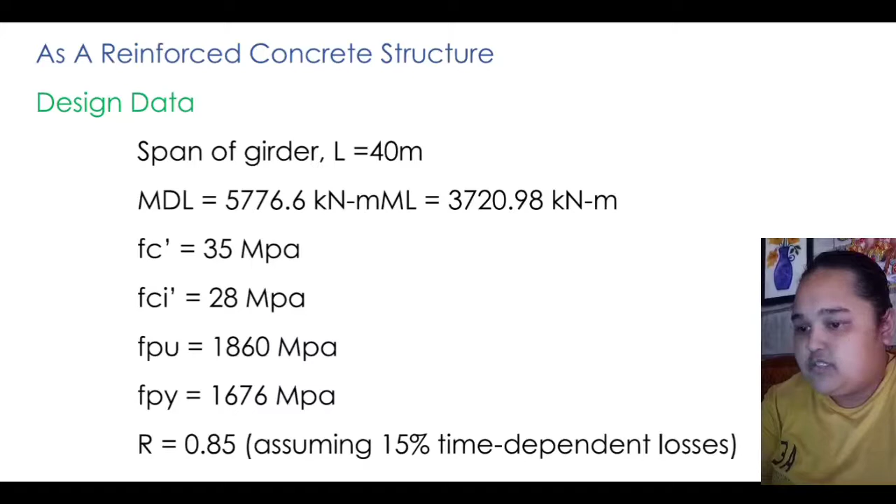3720.98 kilonewton meter, FC prime 35 megapascal, FCI prime 28 megapascal, FPU 1860 megapascal, FPY 1676 megapascal.

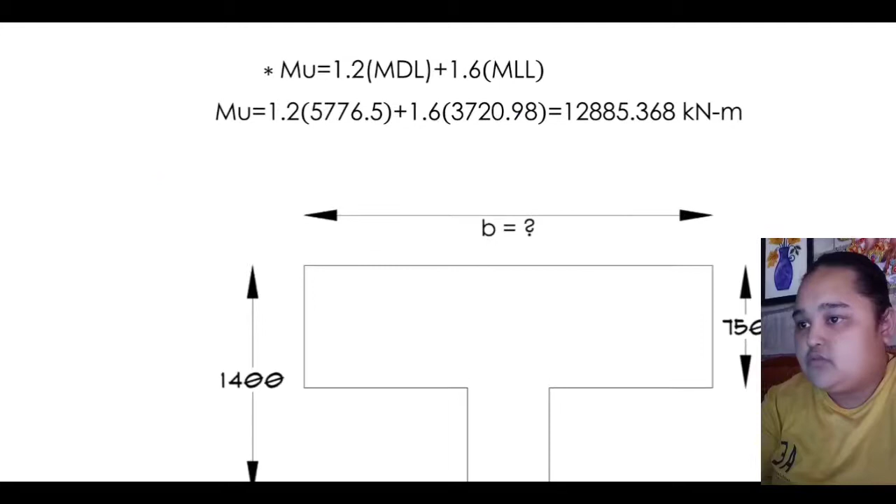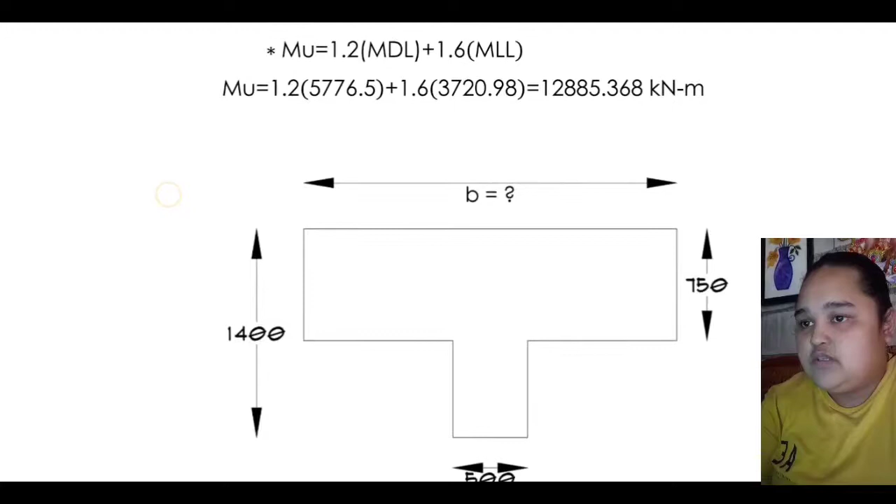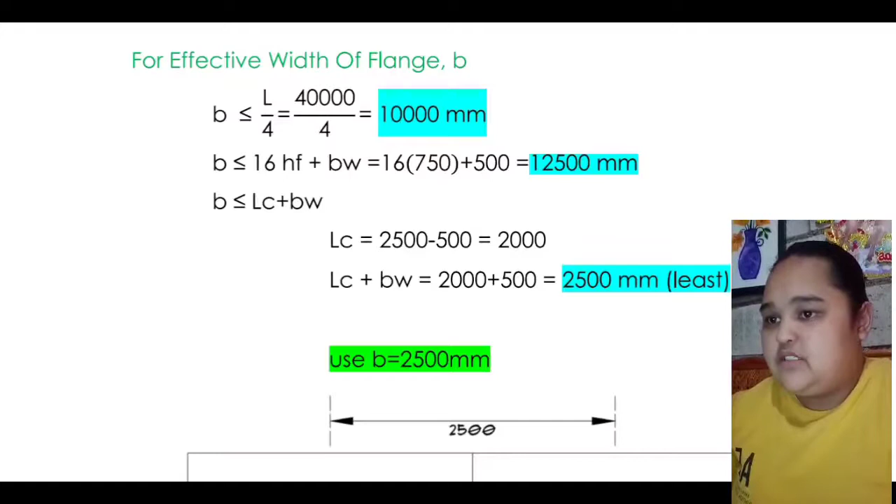Compute for effective width of flange, which is B. B is less than or equal to 40,000 over 4, equal to 10,000 millimeter. B is less than or equal to 16 HF plus BW, which is 16 times 750 plus 500, equal to 12,500. B is less than or equal to LC plus BW.

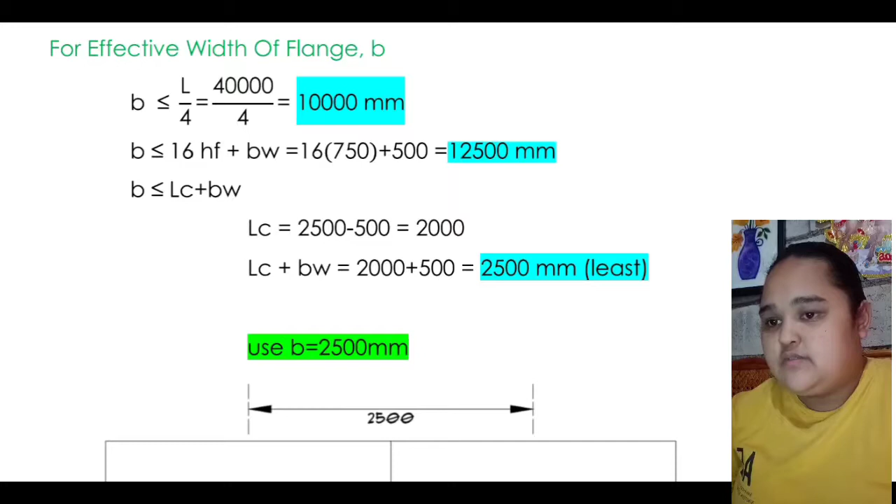LC is equal to 2,500 minus 500, that is 2,000. So B is 2,000 plus 500, equal to 2,500. We can use B as 2,500 because it is the least.

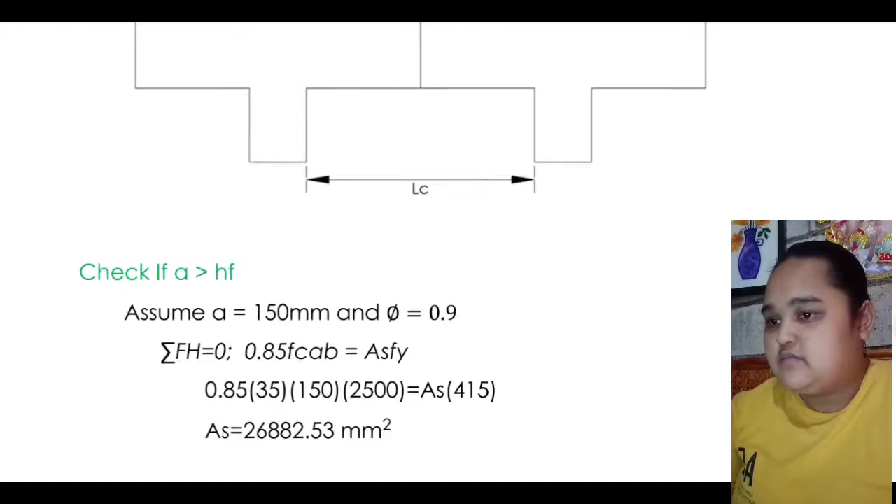Then check if A is greater than HF. Assume A is equal to 150 millimeter and phi is equal to 0.9.

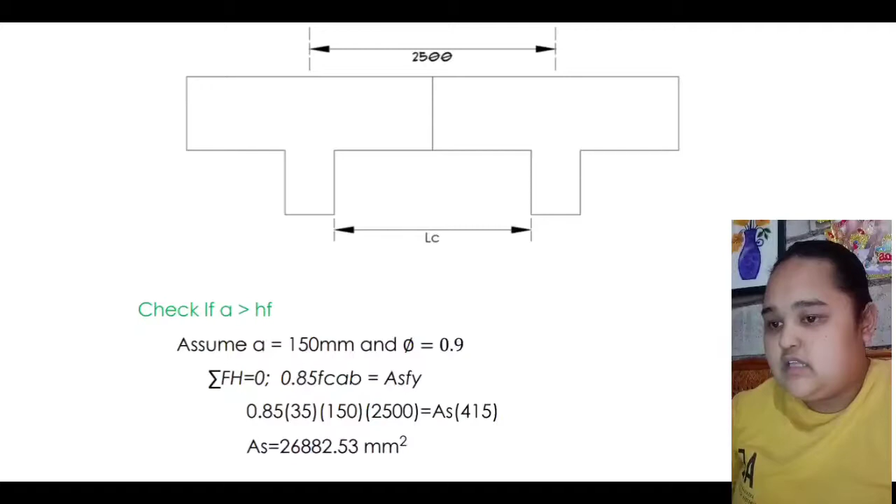Summation of forces horizontal is equal to 0. Then 0.85 FC prime AB is equal to AS times FY. 0.85 times 35 times 150 times 2,500 is equal to AS times 415. AS is equal to 26,882.53 millimeters squared.

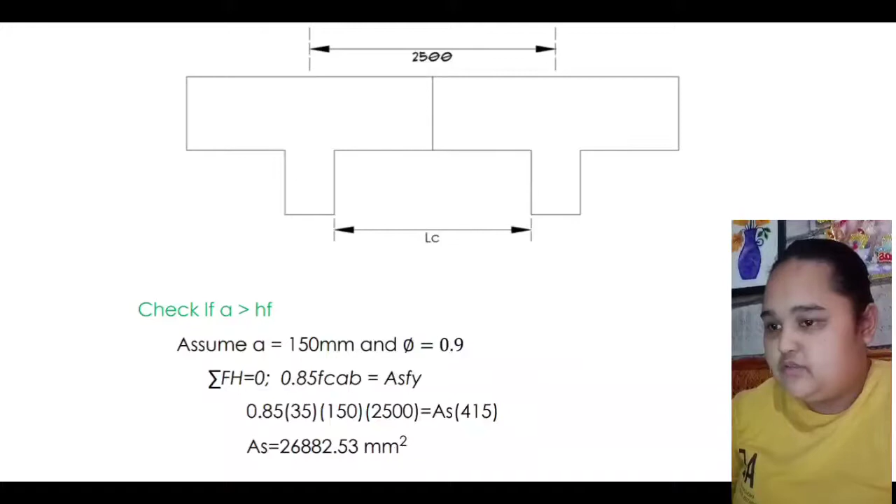Then compute the MU1, which is 0.9 AS times FY, quantity D minus A over 2. MU1 is equal to 0.9 times 26,882.53 times 415, quantity 1325 minus 150 over 2, equal to 12,550.78 kilonewton meter. Since MU1 is less than MU,

design as T-beam. Next is determine AS. MU2, which is 0.9 times 0.85 FC prime times AB times D minus T over 2.

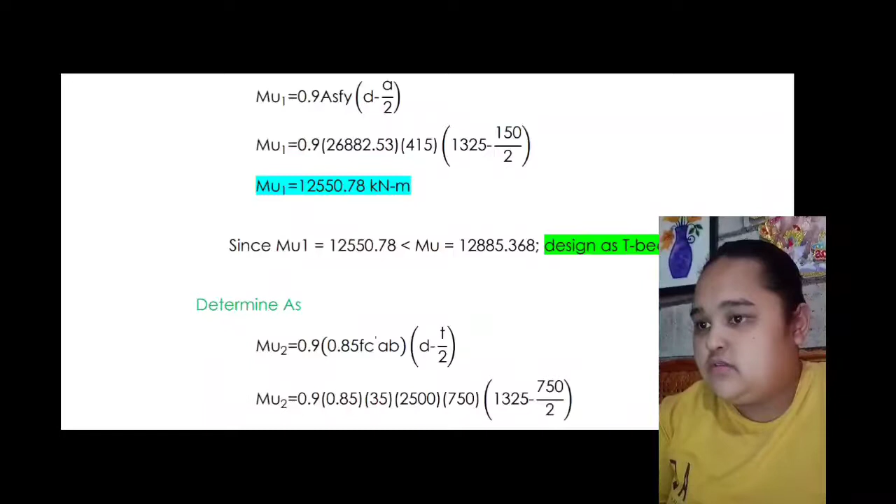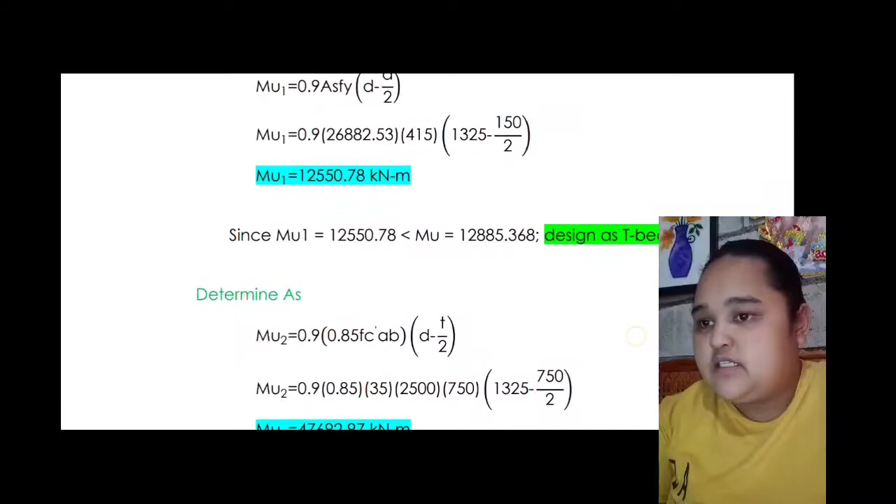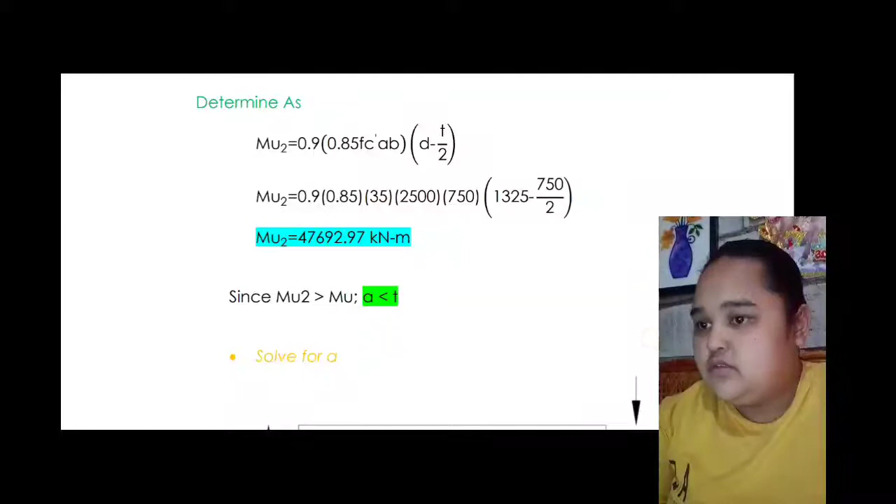MU2 is equal to 0.9 times 0.85 times 35 times 2500 times 750 times quantity 1325 minus 750 over 2. MU2 is equal to 47,692.97 kilonewton meter. Since MU2 is greater than MU,

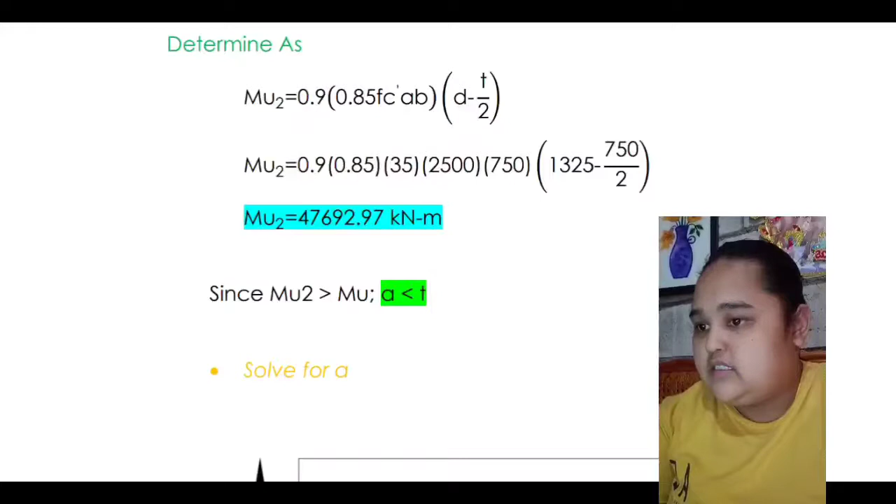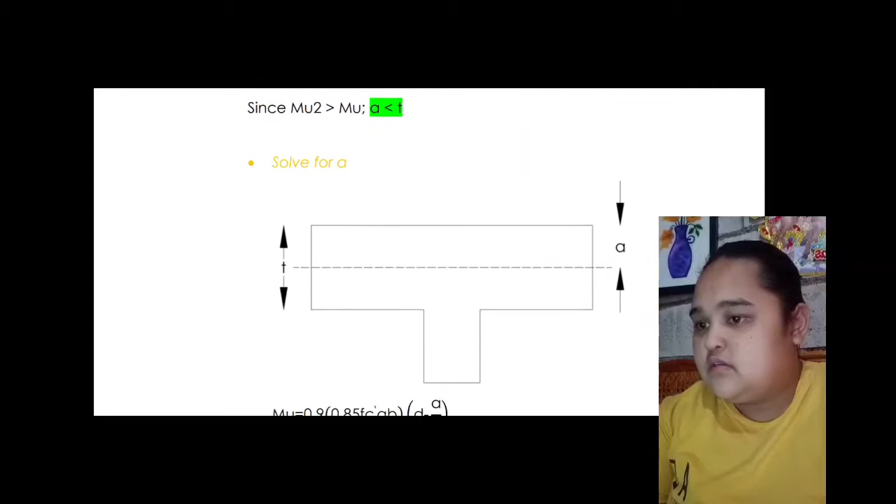A is less than T. Then we solve for A. Substituting the value of mu, we can get the value of A.

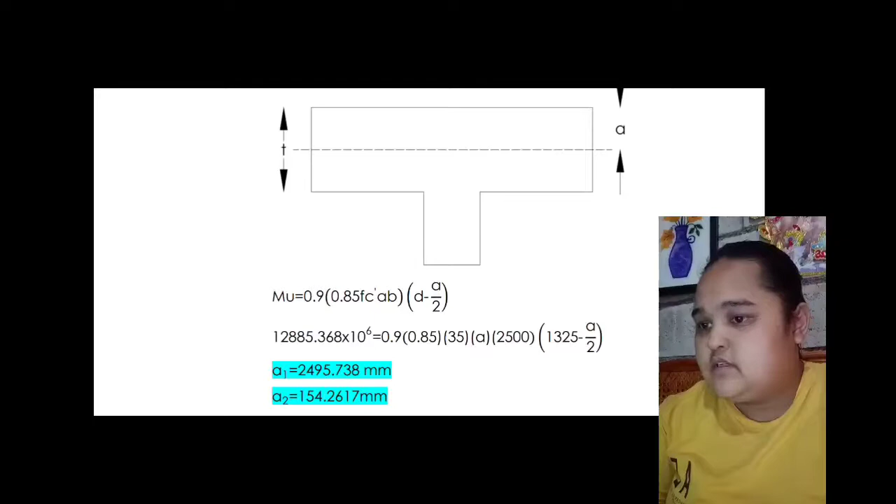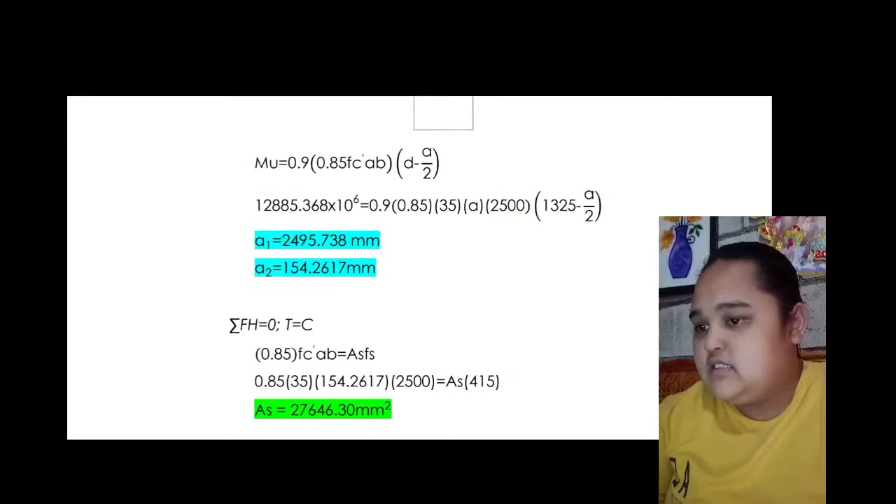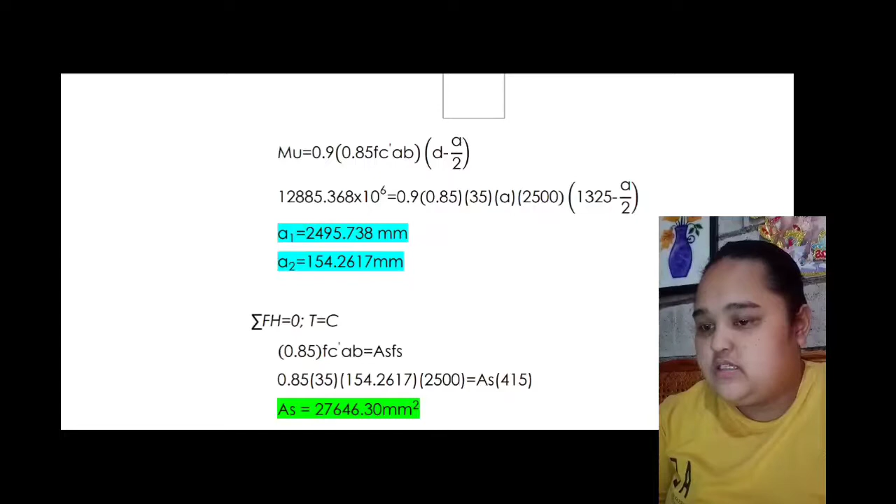Next is summation of forces horizontal, T is equal to C. 0.85 times FC prime AB equal to AS times FS, which is 0.85 times 35 times 154.2617 times 2500, equal to AS times 415.

The next is check if P minimum is less than P and P is less than P max. P max is equal to 0.016. P minimum is 1.4 over Fy, which is 1.4 over 415, equal to 0.00337. P is AS over BD, which is 27,646.3 over 2500 times 1325, equal to 0.0083.

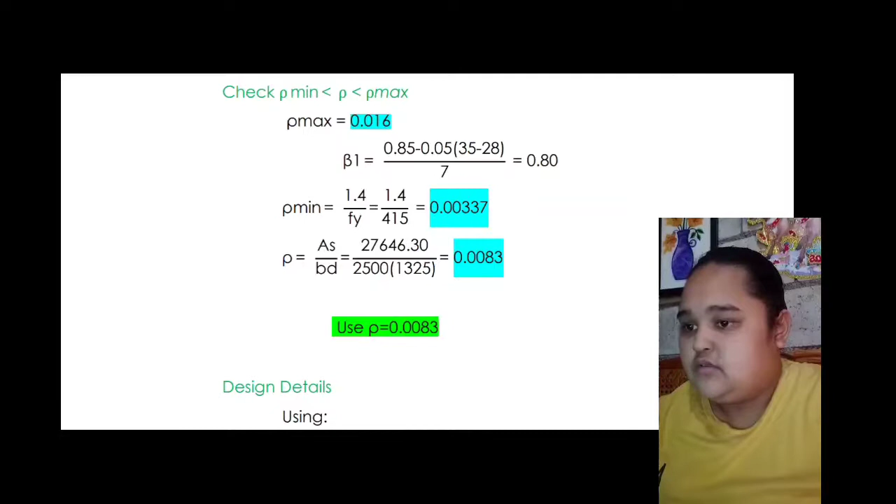Use the value of rho equal to 0.0083. Design details: 28 pieces of 36 mm diameter or 35 pieces of 32 mm diameter.

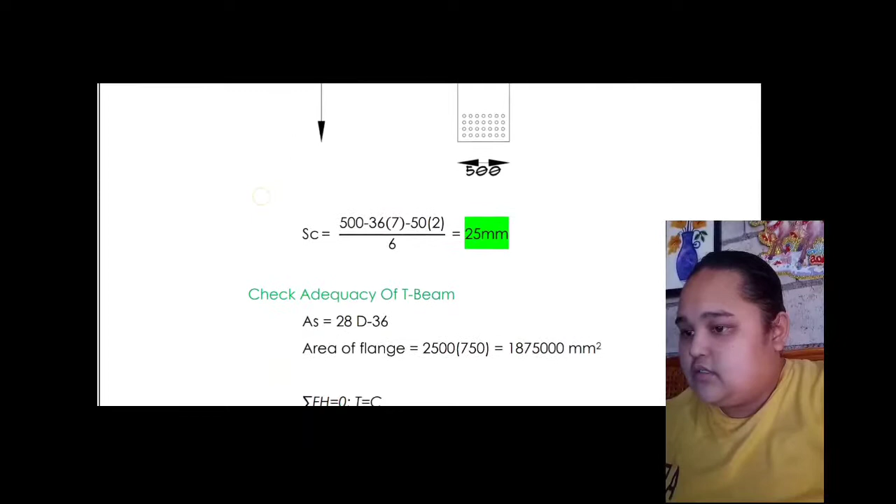Computing for SC, which is 500 minus 36 times 7 minus 50 times 2, over 6, is equal to 25 mm. Check adequacy of T-beam.

AS is 28 pieces of 36 diameter. Area of flange, 2500 times 750, is equal to 1,875,000 millimeter squared. T is equal to C.

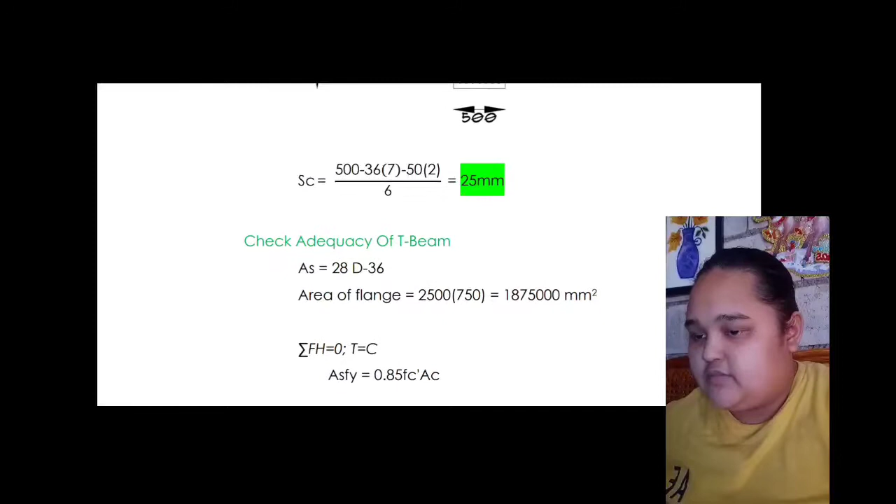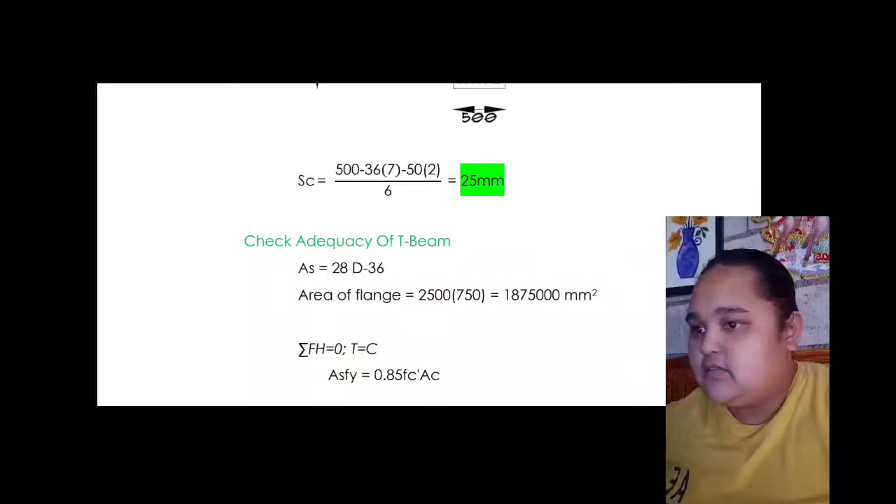AS times Fy is equal to 0.85 FC prime times AC. Then we will get the value of AC. Since AC is less than area of flange, T is greater than A. And compute for A and C.

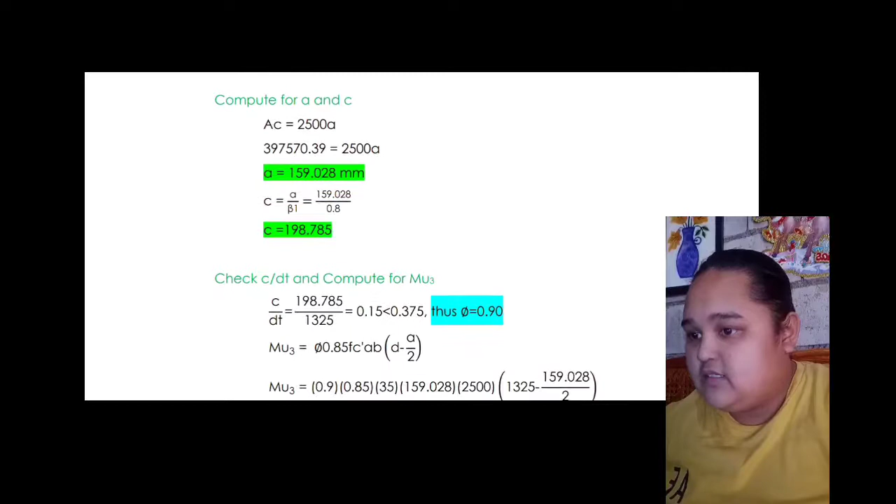AC is equal to 2500 A. So the value of A is 159.028 mm. And C is equal to 159.028 over 0.8, and C is equal to 198.785. Then check if C over dt...

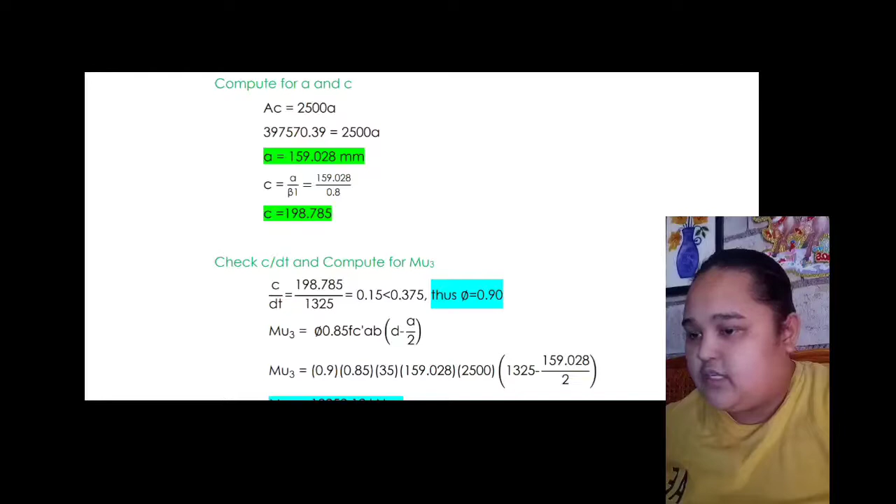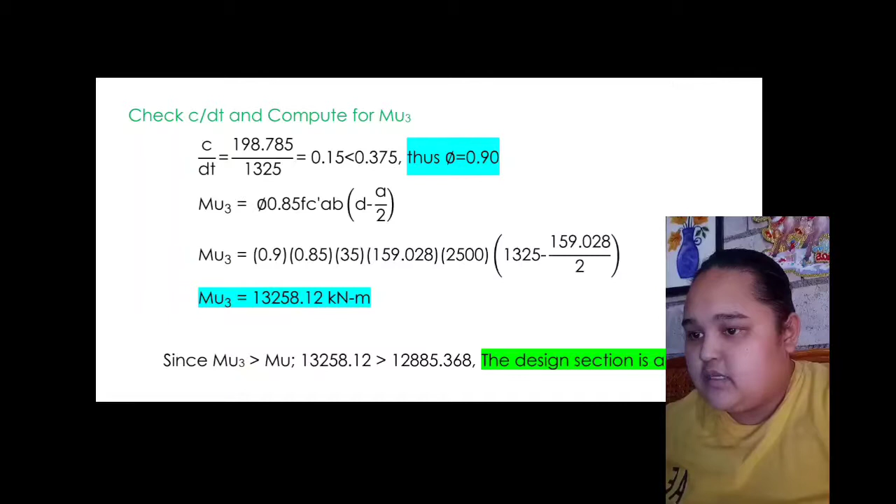and compute for mu3. C over dt is equal to 198.785 over 1325, is equal to 0.15, which is less than 0.375.

So we will use as the phi is 0.9. Computing mu3...

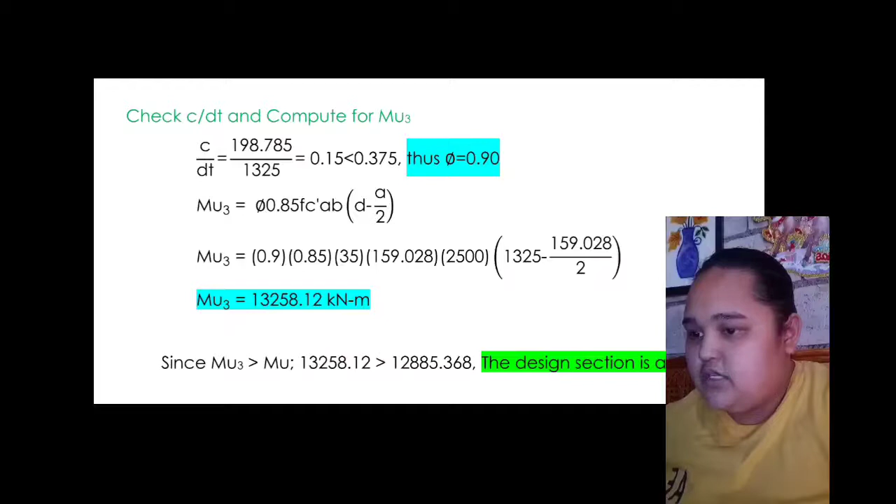is 0.9 times 0.85 times 35 times 159.028 times 2500, times quantity 1325 minus 159.028 over 2. Then the answer is 13,258.12 kilonewton meter. Since mu3 is greater than mu, the design section is adequate.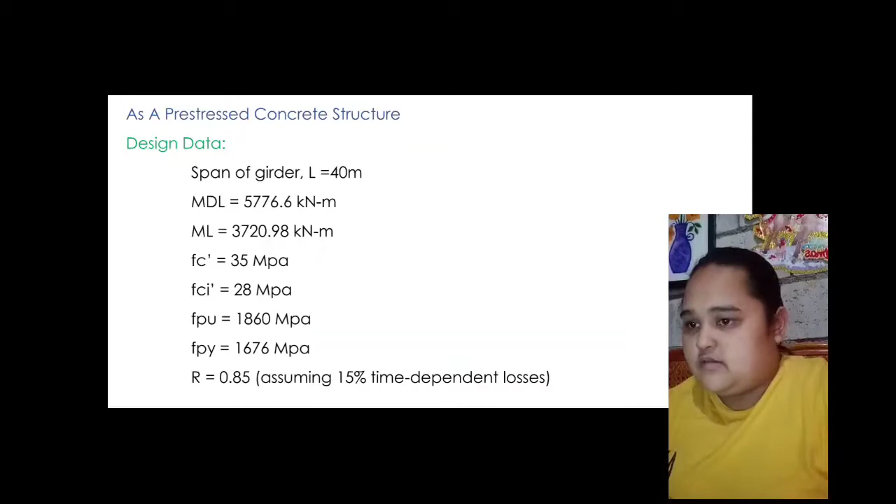And R is 0.85, assuming 15% time-dependent losses. Designing a symmetrical section using the following proportion. BW is 0.5 of B and HF is 0.25 of H. H is twice the B.

Since the beam is post-tension, the tendon will have a variable eccentricity, with critical section at midspan. The allowable stresses...

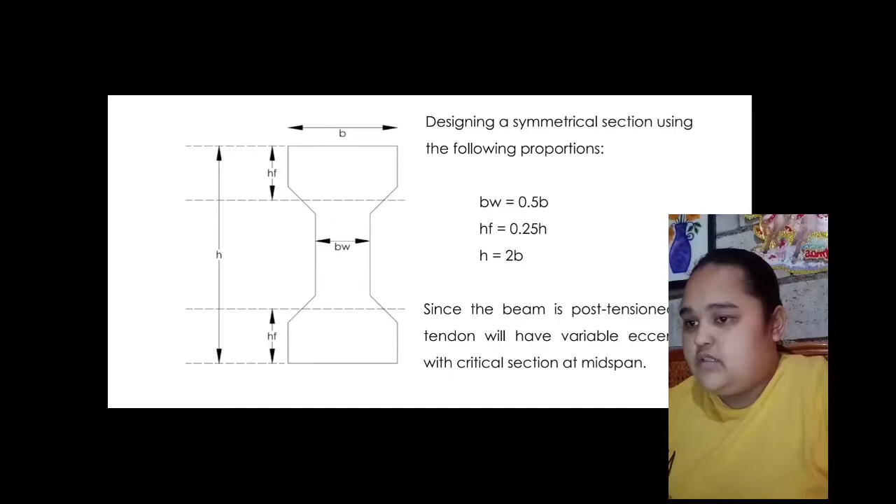in initial stage, FCI, which is negative 0.6 FCI prime, is equal to negative 16.8 MPa, compression. The FTI is equal to 0.25 square root of 28, equal to 1.32 MPa, that is tension.

In the final stage, FCS is equal to negative 0.6 times 35, equal to negative 21 MPa, compression. FTS is 0.62 square root of 35, equal to 3.67 MPa tension.

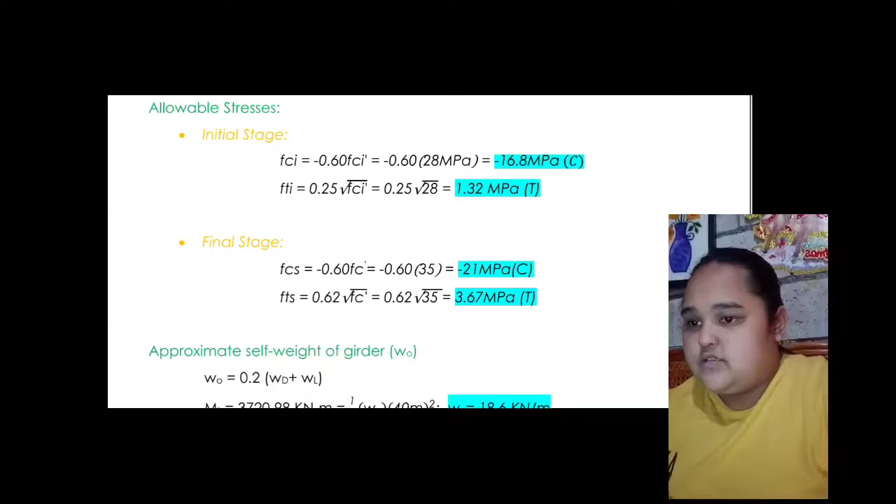Approximate self-weight of girder, WO is equal to 0.2 quantity WD plus WL.

ML is equal to 3720.98 kilonewton meter, is equal to 1/8 WL, 40 meters squared. WL is equal to 18.6 kilonewton per meter.

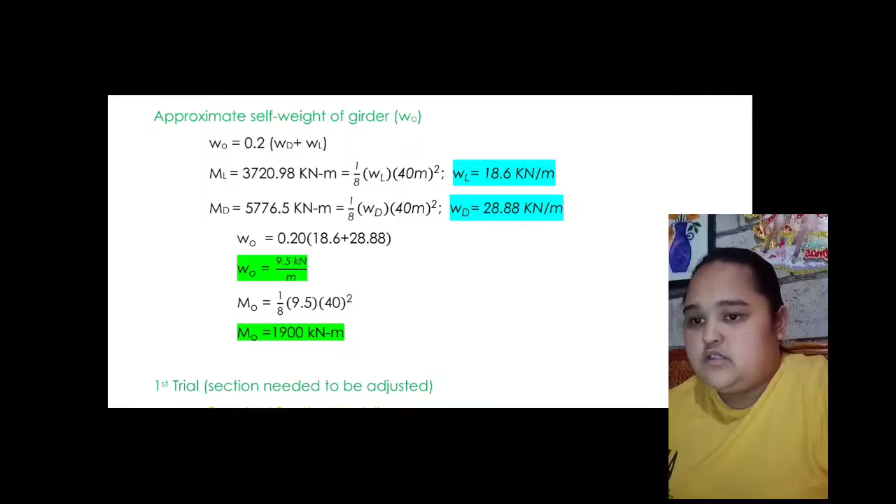And MD is equal to 5776.5, equal to 1/8 WD, 40 squared. WD is equal to 28.88 kilonewton per meter.

WO is equal to 0.2 quantity 18.6 plus 28.88. So it equals to 9.5 kilonewton per meter.

MO is equal to 1/8 times 9.5 times 40 squared, equal to 1900 kilonewton meter.

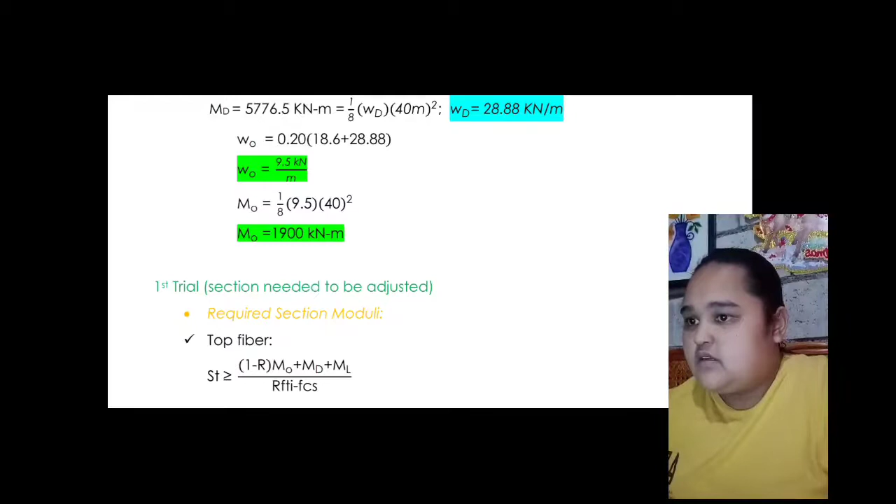Substitute the value, we will get 442.21 times 10 raised to 6 cubic millimeter.

At the bottom fiber, SB is greater than or equal to 1 minus R times MO plus MD plus ML over FTS minus RFCI.

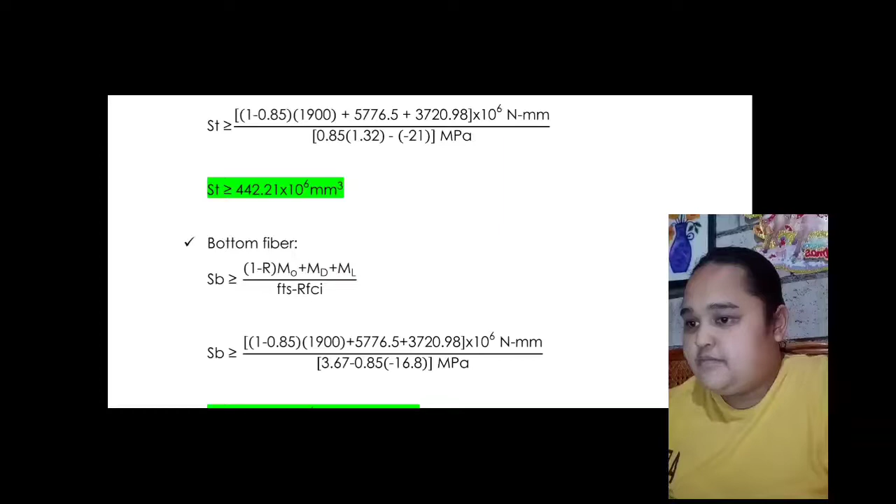Substitute again the value, then we will get 544.98 times 10 raised to 6 cubic millimeter. The bottom fiber governs because it's the larger value.

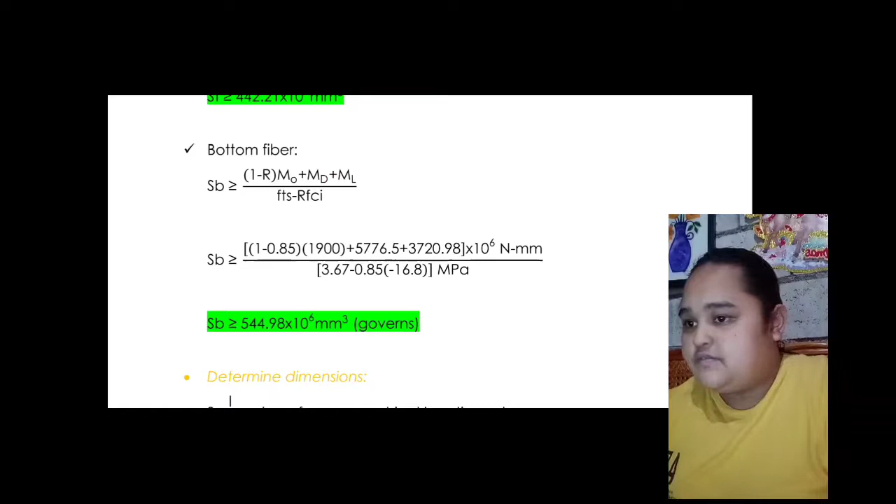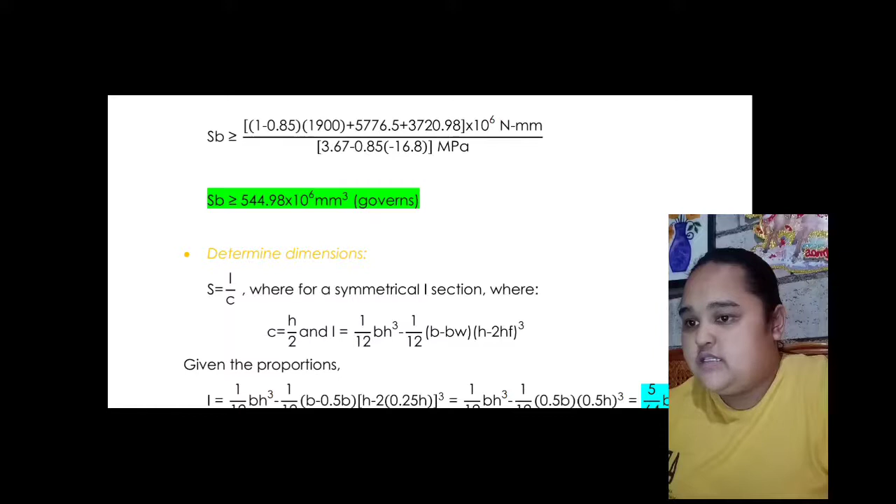The next step is to determine the dimensions. S is equal to I over C, where for the symmetrical I section, C is equal to H over 2, and I is equal to 1 over 12 times B times height cubed minus 1 over 12 times B minus BW times H minus 2HF cubed.

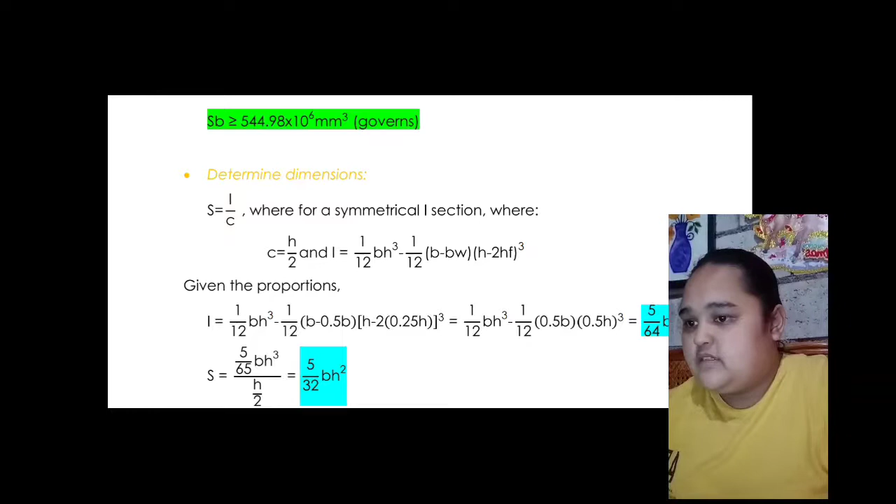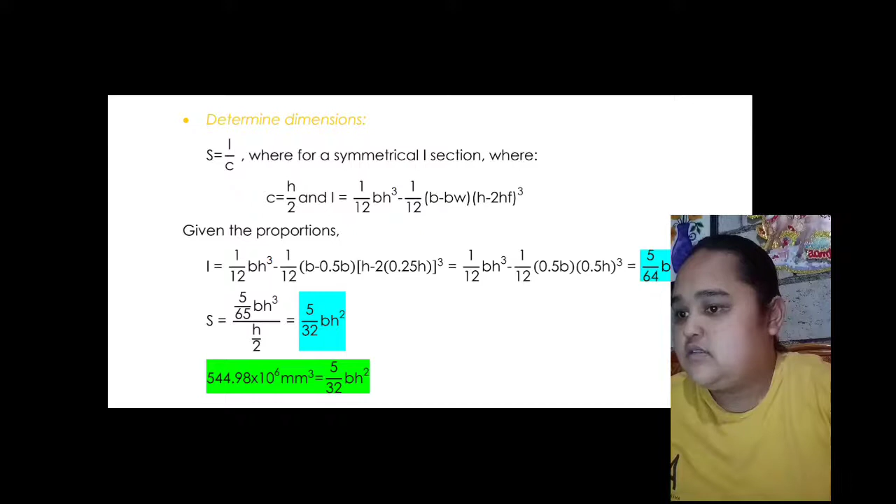Substitute the value, and given the proportion, we will get 544.98 times 10 raised to 6 millimeter cubed equal to 5 over 32 BH squared.

If H is 2B, B is equal to 961.167 millimeter. You can round it up to 1,000 millimeter.

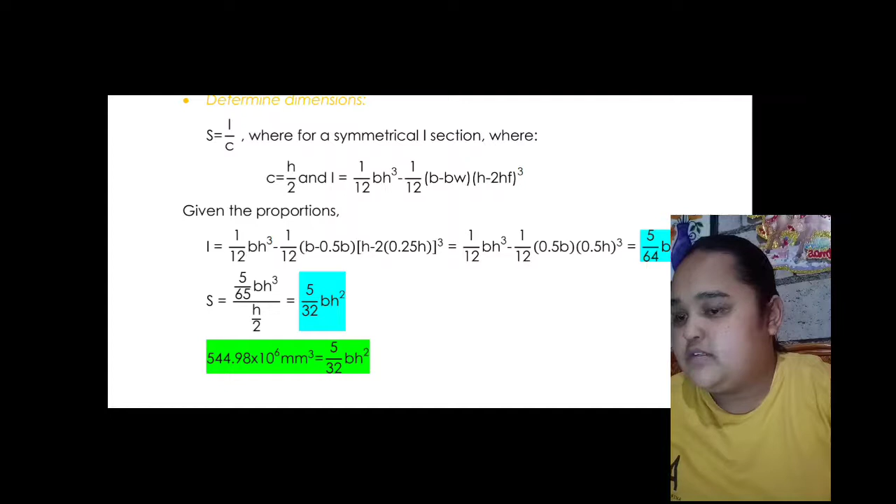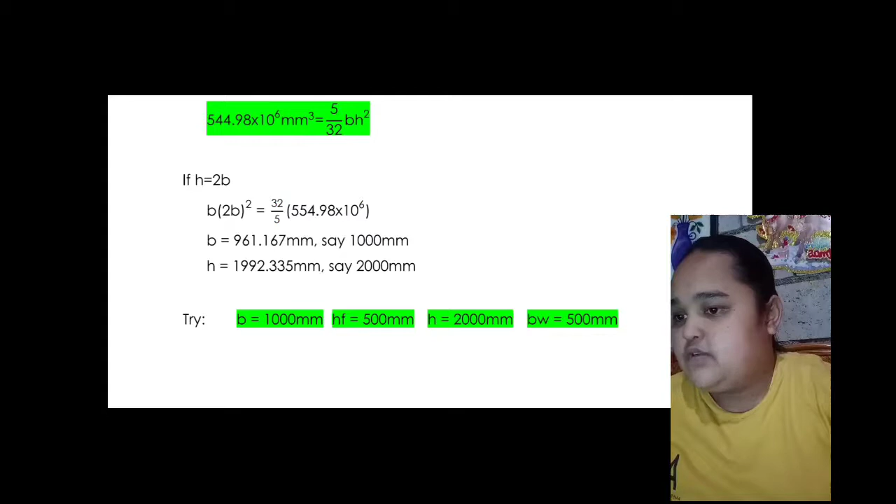H is equal to 1992.335 millimeter, you can also round it up to 2,000 millimeter. Then let's try the value of B is equal to 1,000, HF is 500, H is 2,000, and BW is 500 mm, all in millimeters.

Check the section modulus, S provided: 1 over 12 times 1,000 times 2,000 cubed minus 1 over 12 times 500 times 1,000 cubed, over 1,000, is equal to 625 times 10 raised to 6 cubic millimeter.

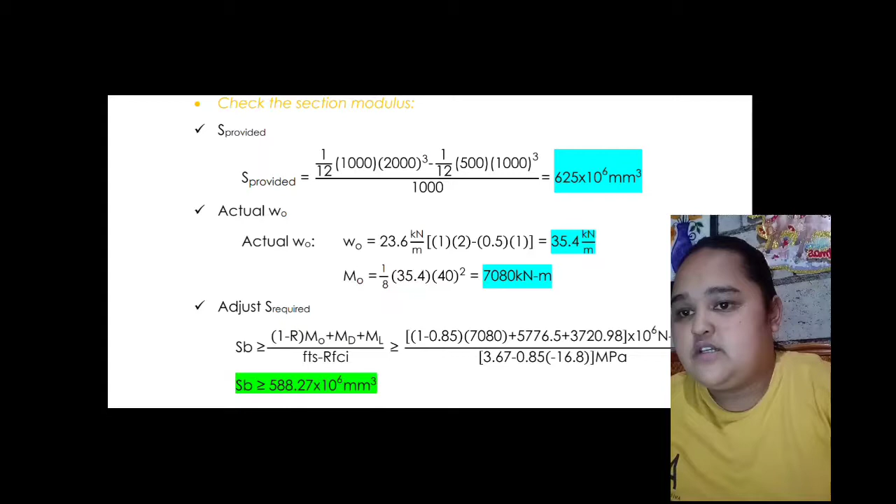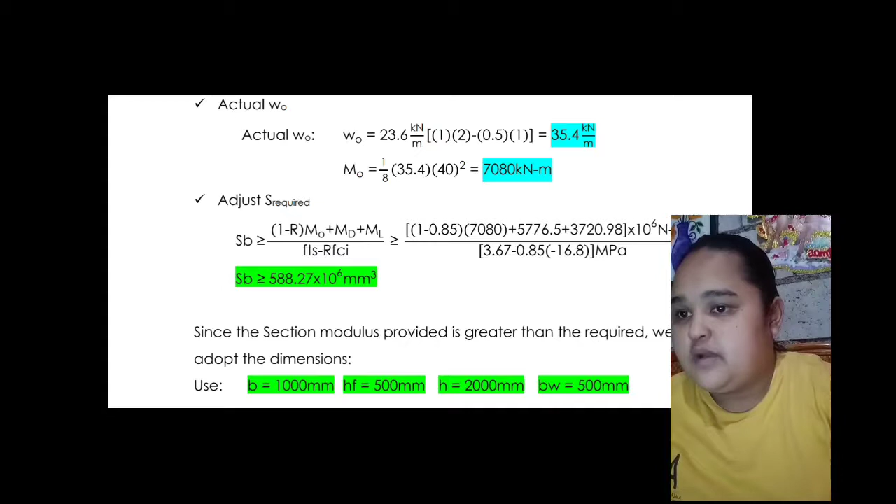The actual WO is 23.6 kilonewton per meter. Quantity 1 times 2 minus 0.5 times 1 quantity is equal to 35.4 kilonewton per meter.

MO is equal to 1 over 8, 35.4 times 40 squared, is equal to 7,080 kilonewton meter.

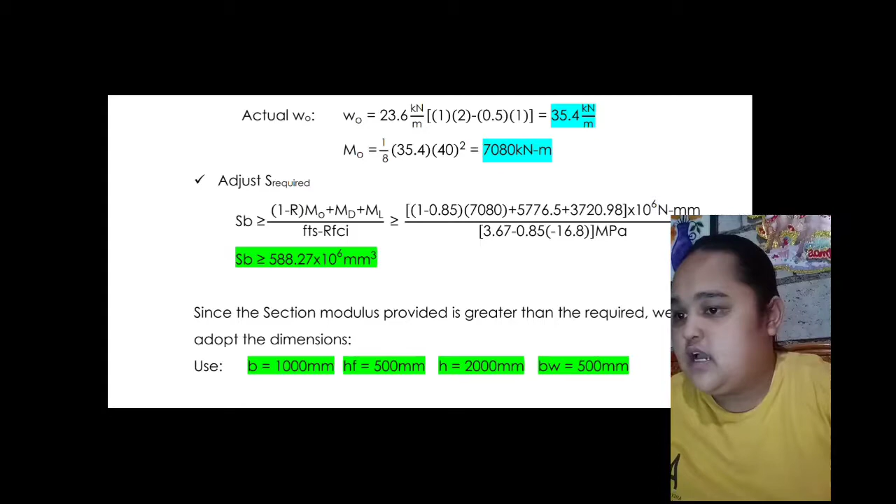Adjusted, the S required, the SB, is 588.27 times 10 raised to 6 cubic millimeter.

Since the section modulus provided is greater than the required, we can adopt the dimensions.

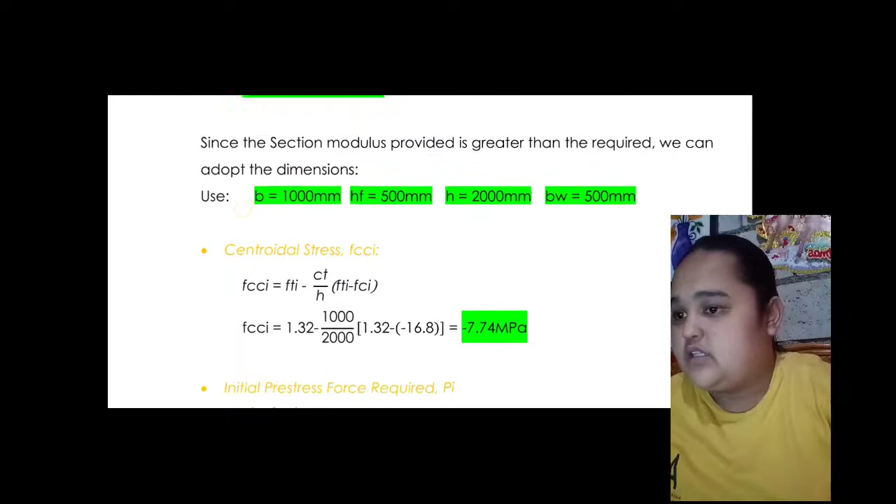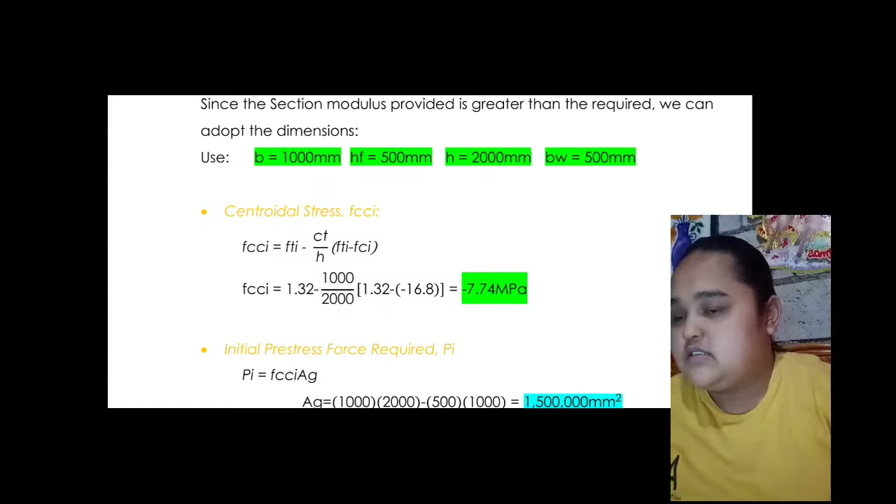Let's compute the centroidal stress, which is FCCI. FCCI is FTI minus CT over H, FTI minus FCI. 1.32 minus 1,000 over 2,000 quantity, 1.32 minus negative 16.8, is equal to negative 7.74 MPa.

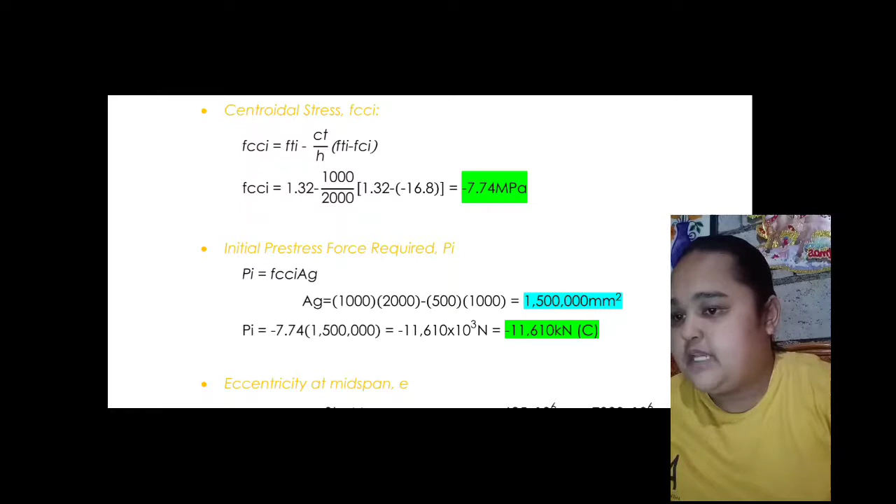The initial pre-stress force required, or PI, is negative 7.74 times 1,500,000, which is equal to negative 11,610 times 10 raised to 3 Newton, which is compression.

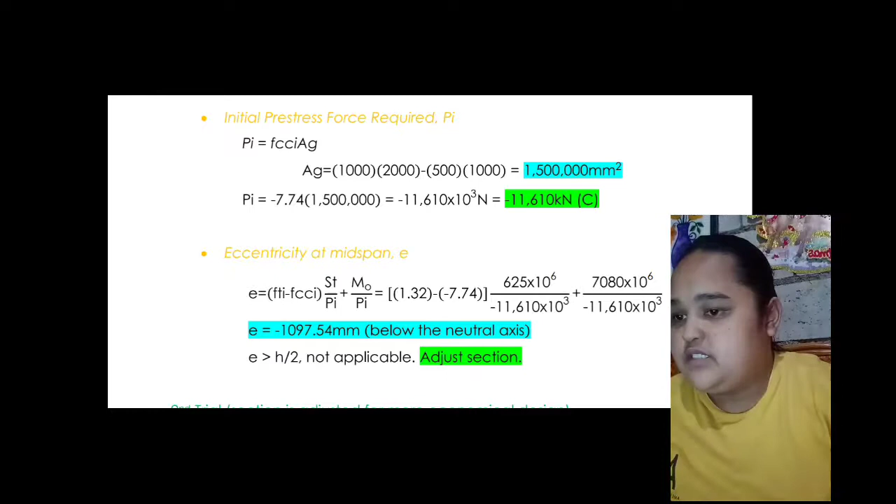The eccentricity at midspan, E, is FTI minus FCCI times ST over PI plus MO over PI. The value is negative 1097.54 mm below the neutral axis.

E is greater than H over 2, so not applicable. Adjust the section.

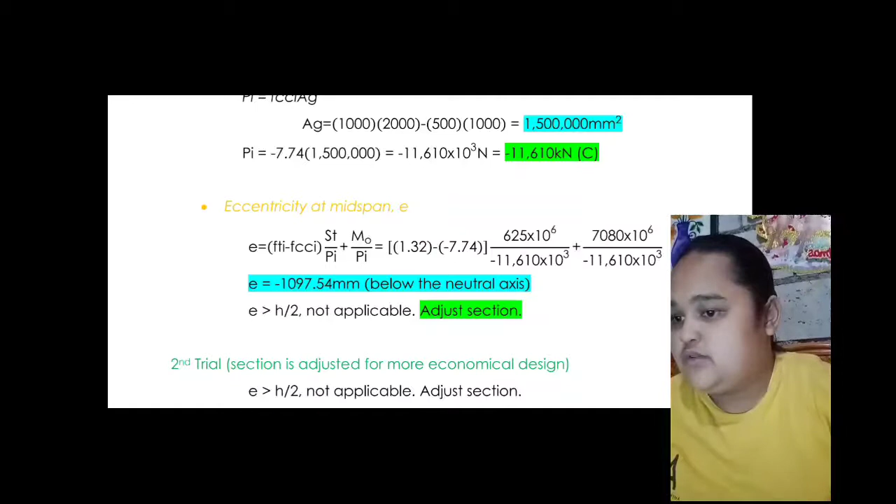The second trial section is adjusted for a more economical design. E is greater than H over 2, it's not applicable, and adjusted.

Check the modulus. S provided is 2,109.375 times 10 raised to 6 millimeter cubed.

WO is 79.65 kN per meter. MO is 15.93 times 10 raised to 3 kilonewton meter.

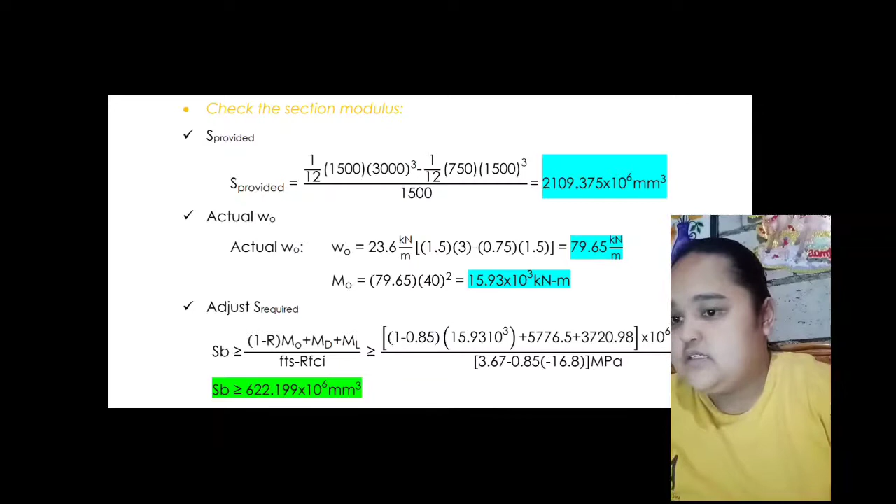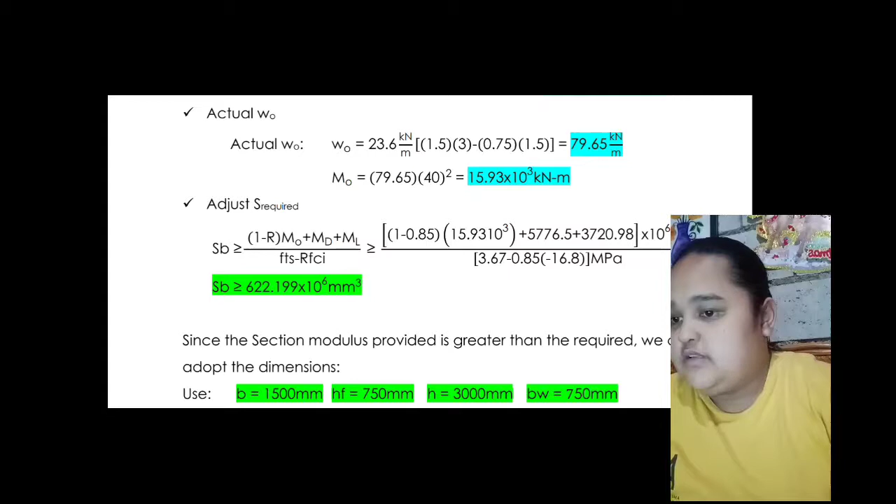The S required is 622.199 times 10 raised to 6 millimeter cubed. And since the section modulus provided is greater than the required, we can adopt the dimension.

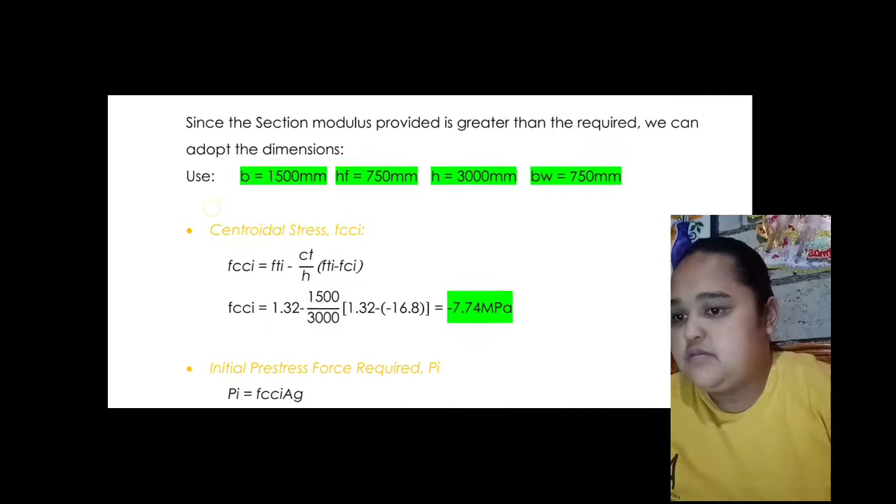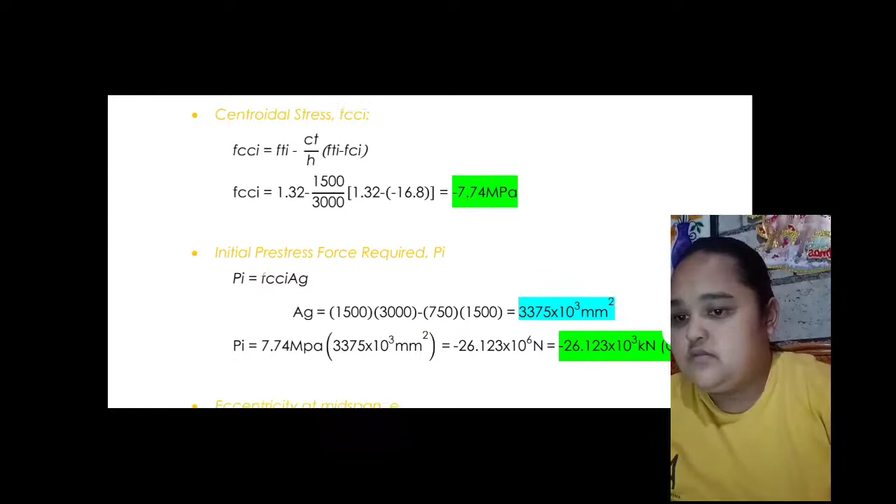Compute again the centroidal stress, which is negative 7.74 MPa. Initial pre-stress force required, or PI, is equal to negative 26.123 times 10 raised to 3 kilonewton compressive.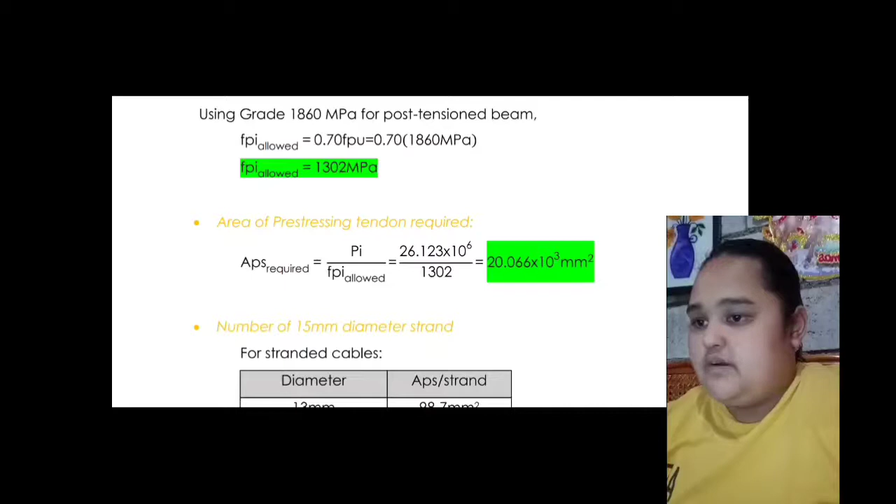The number of 15 mm diameter strand, N, is equal to APS required over APS per strand. 20.066 times 10 raised to 3 over 140 is equal to 144, 15 mm diameter strands, 10 tendons, 14 cables, 1 tendon, 4 cables. And check the strength capacity of the section.

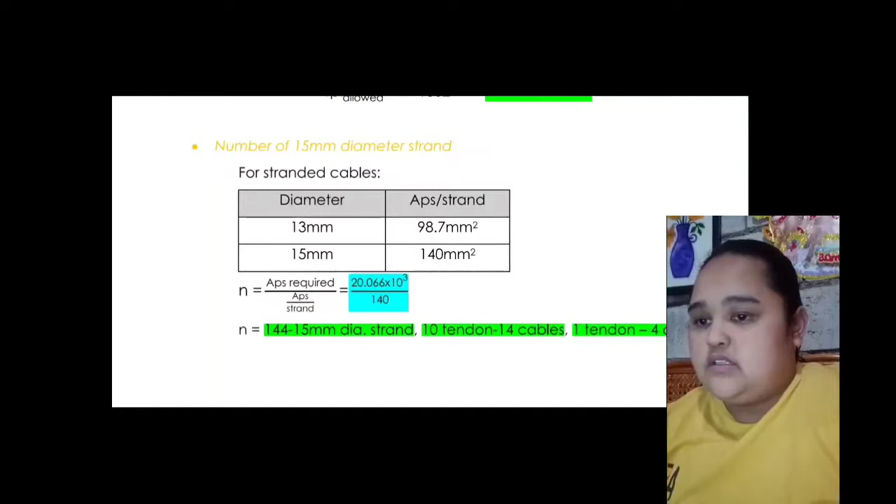APS 144 15 mm diameter strand with E equal to 1,341.383 mm. APS is 144 times 140 mm squared, equal to 20,160 mm squared. And DP is equal to 2,841.383 mm, and beta 1, 0.8.

rho P is 0.00473. Use grouted stress-relieved tendon.

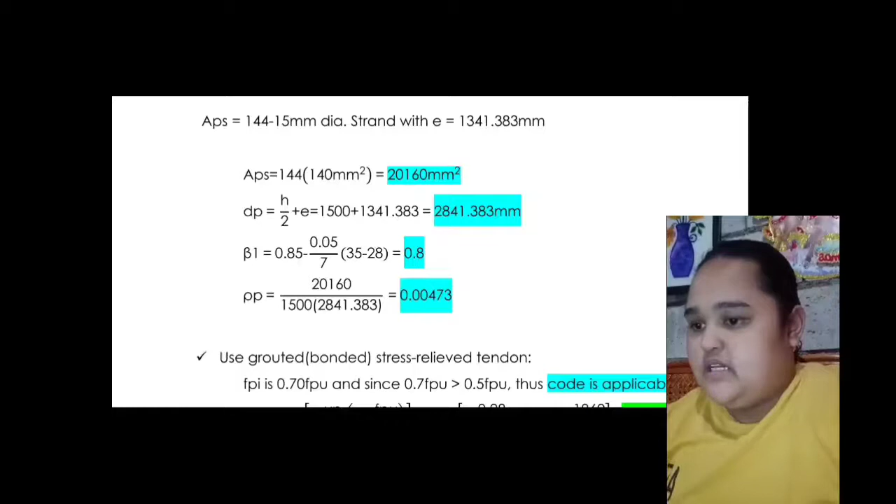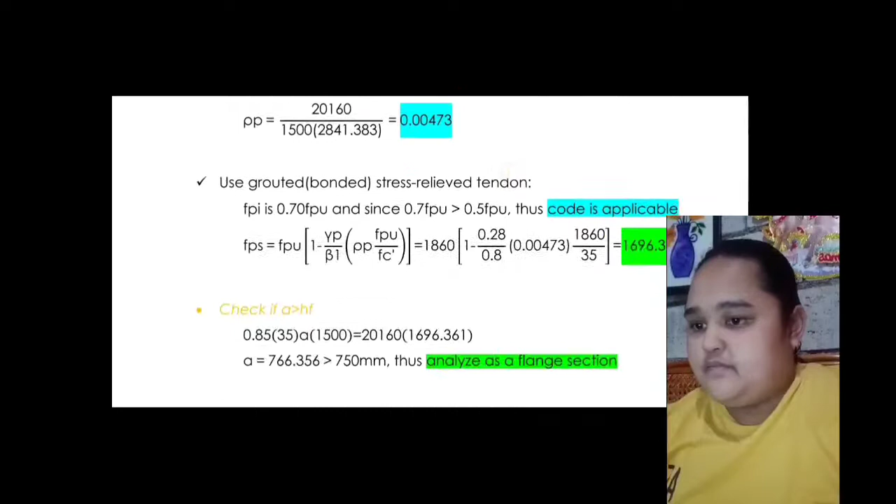FPI is 0.7 FPU, and since 0.7 FPU is greater than 0.5 FPU, thus the code is applicable. And FPS is equal to 1,696.361 megapascal.

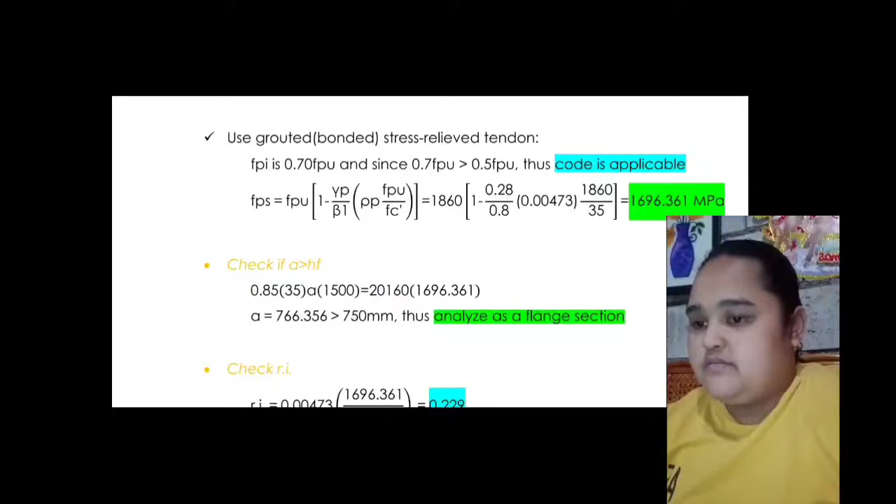Then check if A is greater than HF. 0.85 times 35 times A times 1,500 equal to 20,160 times 1,696.361. A is equal to 766.356, which is greater than 750 mm.

Thus, it is analyzed as a flanged section. Check RI. RI is equal to...

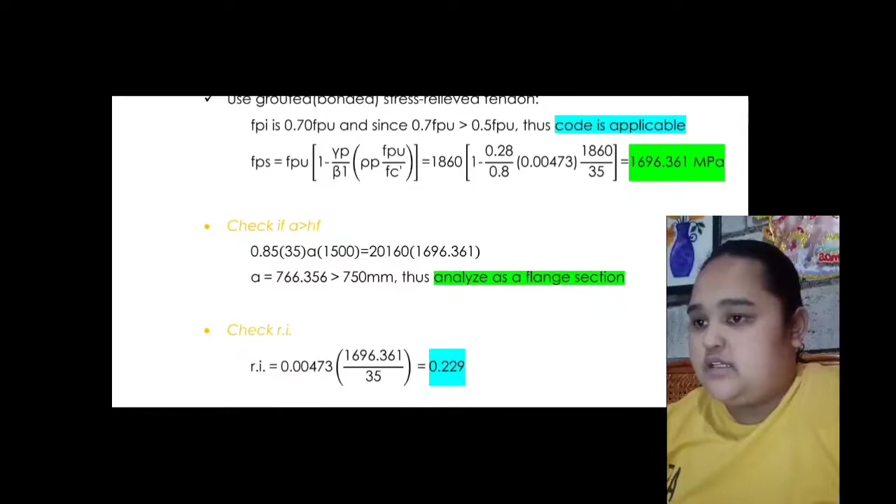0.00473 times 1,696.361 over 35 is equal to 0.229, and 0.36 times 0.8 is equal to 0.288, which is greater than the RI, thus tension failure.

Solve for MN. MN is 0.85 times 35 times 766.356 times 750 times 2,841.383 minus 766.356 over 2, plus 0.85 times 35 times 1,500 minus 750 times 750 times 2,841.383 minus 750 over 2.

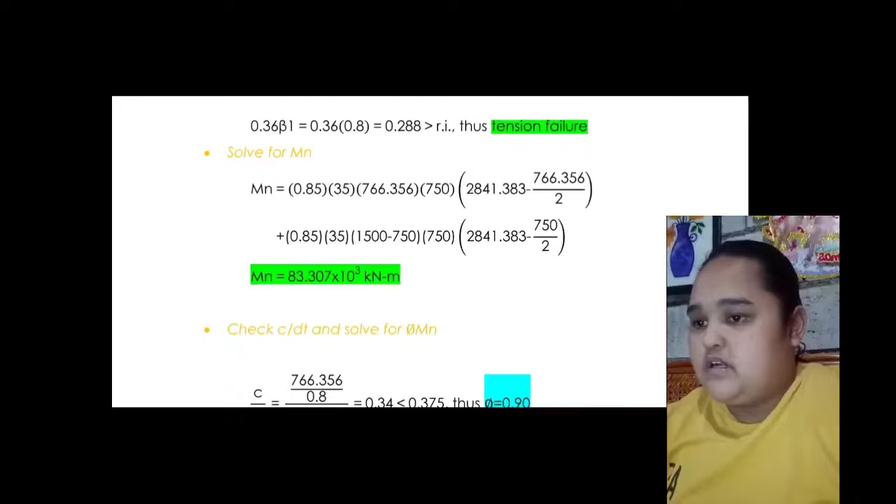And MN is equal to 83.307 times 10 raised to 3 kilonewton meter.

Check C over dt and solve for ultimate moment capacity. C over dt is equal to 0.34, which is less than or equal to 0.375. So we can use the value of 0.9.

The ultimate moment capacity is 0.9 times 83.307 times 10 raised to 3 kilonewton meter, which is equal to 74,976.3 kilonewton meter. Then, actual factored design moment,

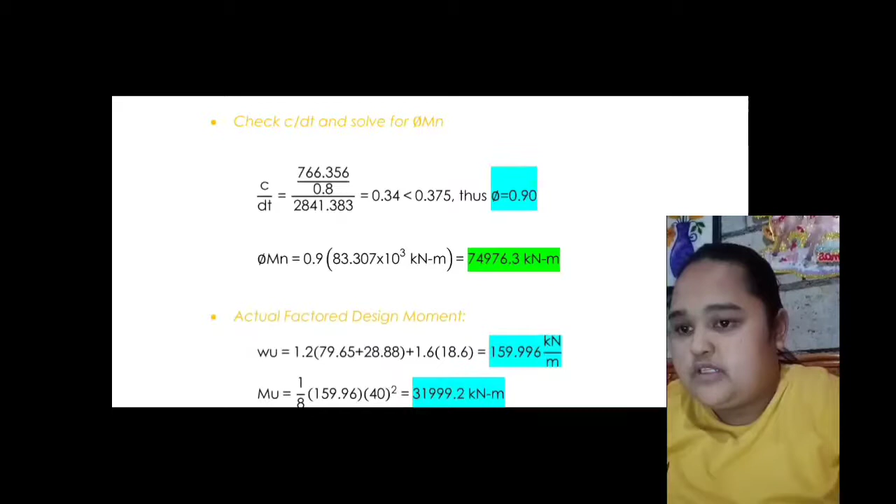WU is 1.2 times 79.65 plus 28.88 plus 1.6 times 18.6, equal to 159.996 kilonewton per meter. MU is equal to 1 over 8, 159.96 times 40 squared, equal to 31,999.2 kilonewton meter. Since MU is less than the ultimate moment capacity, the section is adequate.

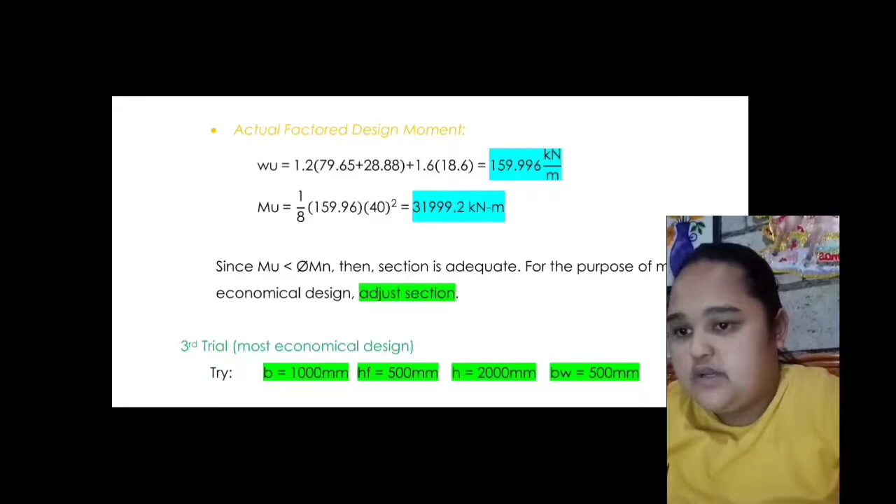For the purpose of a more economical design, adjust the section.

In designing a structure, one must consider alternative materials to have choices in picking the most economical, effective, and strongest material. As an initial assessment of designing the bridge, it is said that the more advantageous material will be prestressed concrete, since the bridge is spanning over 9 meters, and by computing the moment capacity of reinforced and prestressed concrete.